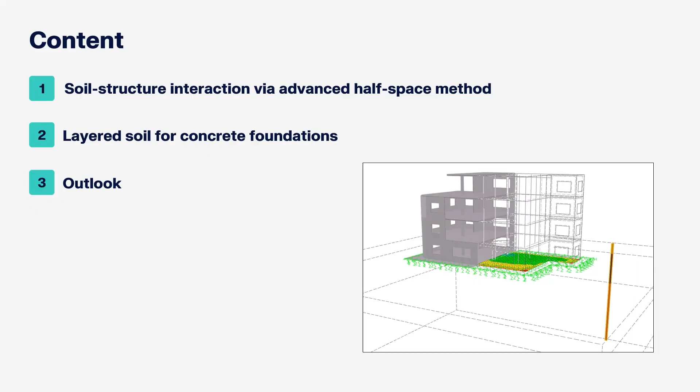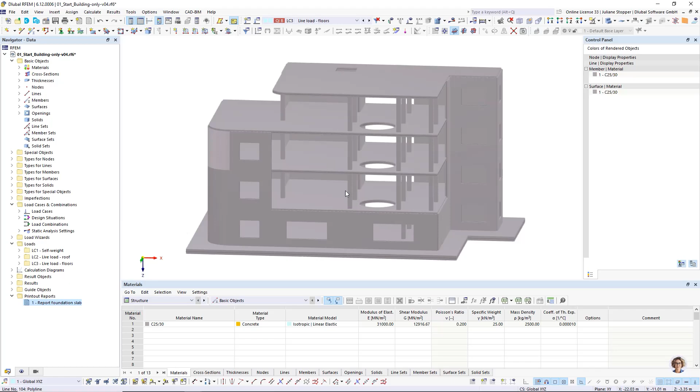Okay, that's it for the content, and now I would like to directly go to RFEM 6. Here we can see the building that is prepared for our model today. We now will work on preparing the input for the advanced half-space method. We have here a concrete building with walls, columns, slabs, and loads are prepared too. We have some loads as example, and now we can go to the geotechnical analysis.

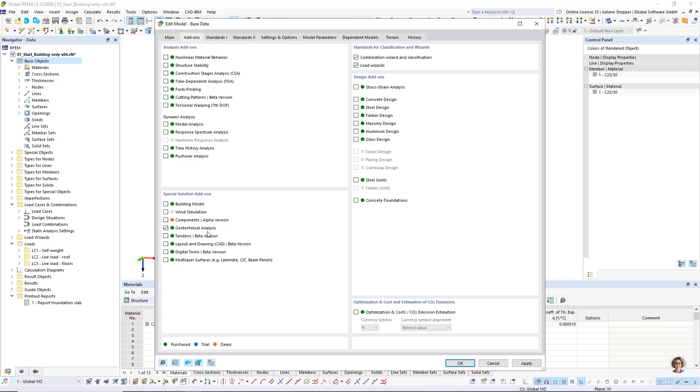The first step is that we need our add-ons, so we go to the base data, and here we can see the add-ons, and we should switch on the geotechnical analysis. With activating the add-on, the input options, calculation, and also the output options for geotechnical analysis are integrated into the main program.

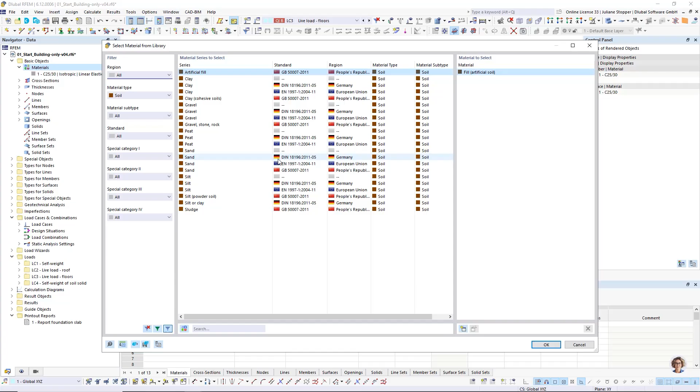The first step we start with is the materials. We have to define our soil materials, so let's create a new material. For the advanced half-space method especially, we would recommend that you use a material from the library as start material, and then you can modify the material properties. So let's go to our library. Here we can see different materials, and we will take this sand, as we anyway will give the input for our material described in the geotechnical report for the current project.

We have here material type soil, and the option user-defined material is always active, so we can directly start to modify the values that came from the library. If a material comes from the library, we have this register material values, and this is why we recommend it, because here you have more input values for soil property descriptions, and especially the oedometric modulus or constrained modulus, which can be used for the advanced half-space method.

This modulus is related to the modulus of elasticity and the Poisson's ratio. That's why we have connected them with equations. For example, if we give here another value, then our E modulus will change, and the other way around too. The Poisson's ratio you have to give directly, and the modulus of elasticity and the constrained modulus are calculated from each other and the Poisson's ratio.

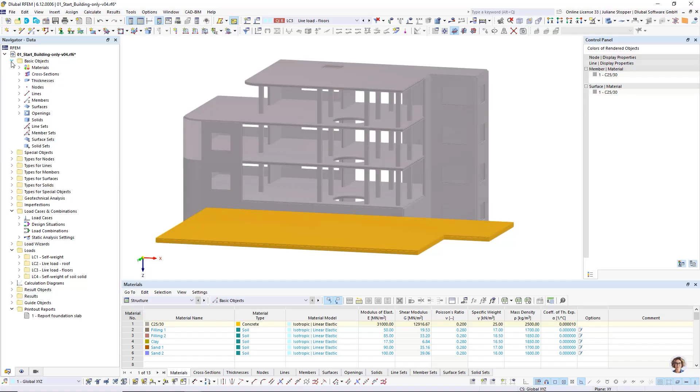Okay, then that's it for the materials. Here we are in the folder for the basic objects, so we find here cross sections and thicknesses of the building and other structure objects. Now we will go to geotechnical objects, and these we can find here in the geotechnical analysis folder. And we will start with the boreholes. So I go here and say create a new borehole.

The borehole can be used to give the information about the soil stratigraphy that was found by the tests and is described in the geotechnical report. You can directly give this input here. You can give the position where this soil stratigraphy was discovered, and then you can give the soil layers and so on. Here we also can give a groundwater layer. So let's say we have here 2 meters,

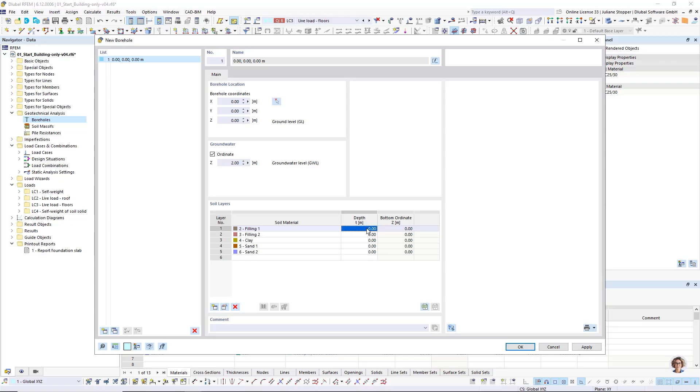and then we can give the soil layers, and we start with putting the materials that we just defined in the right row, and then we can define the thicknesses. The first layer has a thickness of 1 meter, the second layer has a thickness of 2 meters, then we have 1 meter of clay and 11 meters of sand 1, and we will give another 16 meters for sand 2. Okay, so these are the soil layers that were found or discovered below our building.

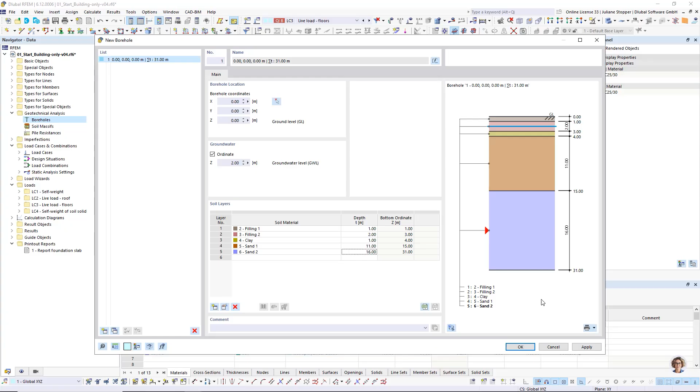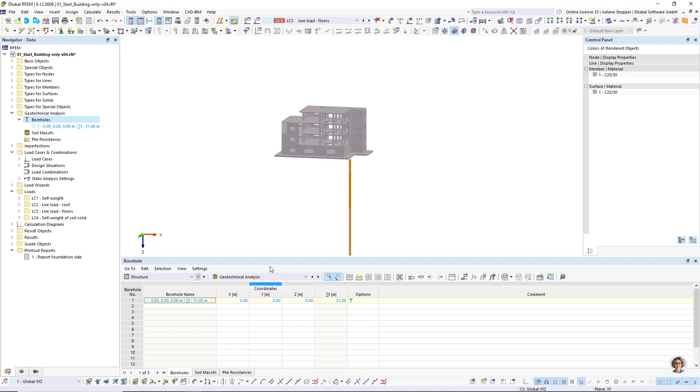We can say okay, and we have our borehole here, and we can also display it, so that we can see it graphically. This is our navigator for display, and here we can find also the boreholes, and we can see it is placed here now. The boreholes you also can find in the table, of course. We have here the structure, and here's geotechnical analysis objects. And here you can also fill borehole data, the coordinates, and you can also use the export and import for this table. This is just a small info beside.

You, of course, can define more boreholes, but for today we will just use one. It is shown in previous webinars how to model this with more. Okay, and then we can now go to the soil massifs. I do a double click so we get to the dialog for new soil massif. Here we can assign the boreholes that shall be used for this massif. And here we have definition type for the soil massif, and we have boreholes set. So this means the soil body, let's say, will be defined using the boreholes. We will see.

It will generate the layers, and I will show you afterwards, but let's go on with the input. Here you have the selection of the soil representation type, how our soil shall be modeled in this analysis. We have the finite element analysis provided for soil, but today we want to use the advanced half-space method for consideration of soil structure interaction. So this is our representation type today.

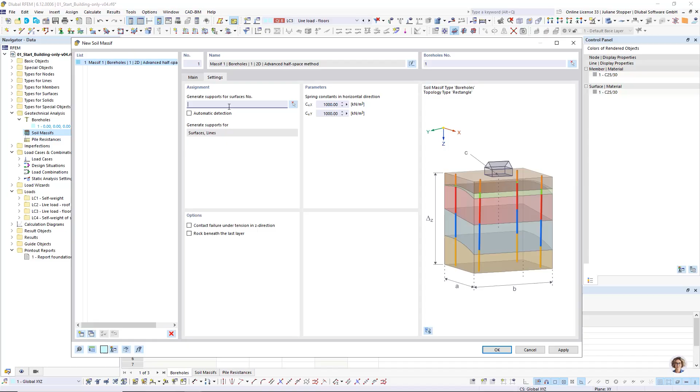We will also use the groundwater generation, so it will consider groundwater. With activating the advanced half-space method, we got this special settings tab, and here we give further input for this method. Here we have to select the surfaces that shall be supported. I will select them, I have 2 surfaces. Now they are assigned, and it is prepared.

We can see here on the right side that our advanced half-space method will generate vertical springs, and here we have horizontal springs, and these are the default values. We will keep them for our webinar model. The automatic detection will be provided, and here we can see what will be generated.

We will generate the surface support, and we will also have a line support to consider the soil next to the slab, and it's the support by the surrounding soil and also the shape of subsidence. We will have a look at this later.

Here we can find further options. We can activate that we want to consider failure under tension for the generated supports, and this option here is for simulating or considering a rock beneath the last layer, which will bring it about that below the last layer we defined in the boreholes, a very high stiffness is considered. But we will not use it here.

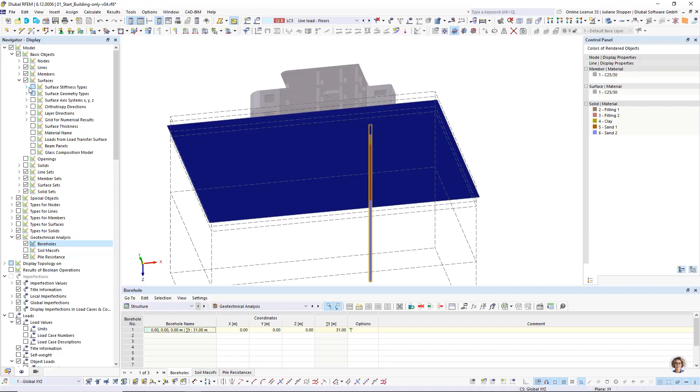So we keep the settings like this, and we go on OK, and we will see what is happening. I would like to not see that groundwater surfaces, it is not needed, so we deactivate it. Okay, so what do we see here?

Also, I want to have this transparent mode, and we go to the navigator for display and switch on the types for surfaces and types for lines. Now we can see here our building with our foundation slab, and we can see the lines of the soil and the soil layers, and we can see that some supports were placed. We can have a look at them here.

They can be found here in types for surfaces. Here we have our surface support, we will do a double click. This color means that it's a generated object. We can also see here with this button that it is connected with the parent, the soil massif, so it was generated by the soil massif.

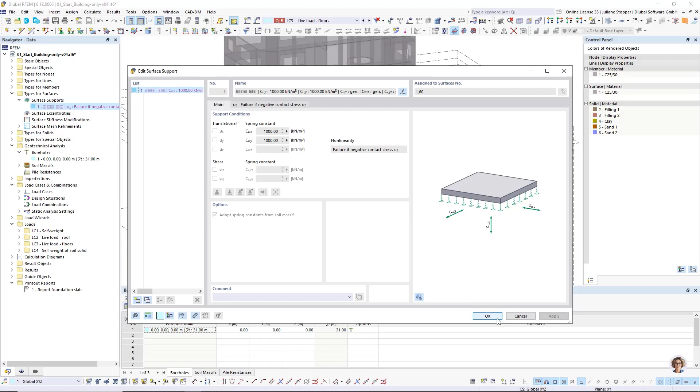And here we see our horizontal springs that were defined, and all the other values, the vertical spring Cu,z and the shear springs, will be generated for every finite element with the advanced half-space method. We can see that we have here our nonlinearity, our failure if negative contact stress σz. Then we can leave this and also have a look at our line supports. They are here, also generated, and we can see that we have the failure here too, and here the Cu,z will be generated.

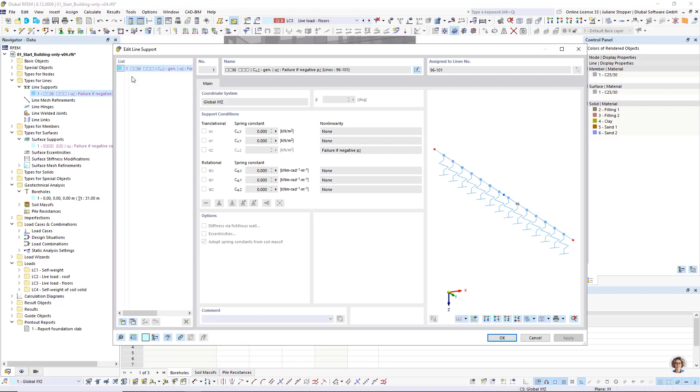We have a small workaround in the current state. If you just want to have the advanced half-space method producing just the surface support, it is possible that you can assign a manually defined support, for example this one, and give here a small value, and you can assign it to a line here at the boundary. Then this support will override the generated support, and in this way it's also already possible in the current state to just have a surface support here. This is just a short hint.

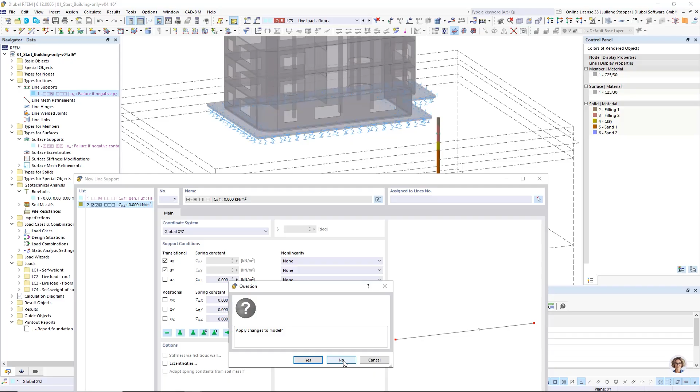No, I don't want to apply this. It is planned in the future that we also will provide that only surface supports can be generated.

Just as small info beside, but in the current state we have surface support and line support. One more thing, we can go back to the soil massif. I want to show you.

If we go here in this setting, in our dialogues we generally have this button, and if you want to know what some of these settings mean, you can go to our online manual, and here we provide information for this dialogue. It's linked here, and we can see information about the supports generated for this method. We have surface and line, and you can also go to the background chapter to see the equations used in this method.

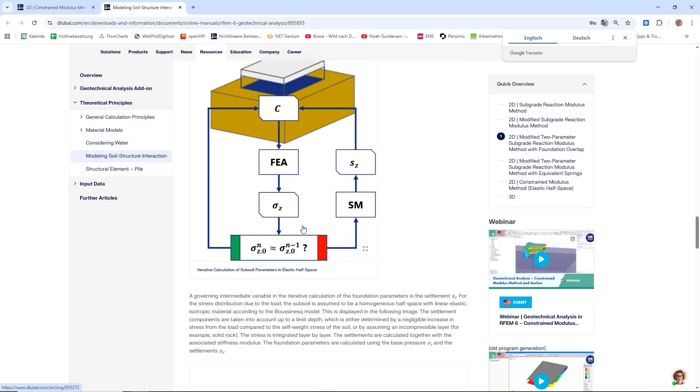We are now here, elastic half space method, and here we have a description and the equations for Cu,z and for shear springs, and also for the line support are provided. Just a small info beside.

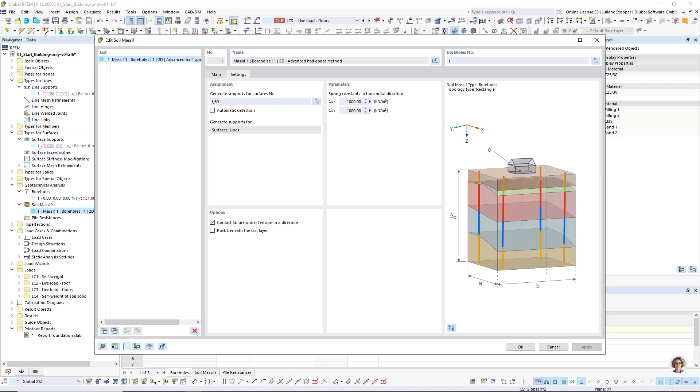Okay, then we can go back to our model. We are here. And we can leave this dialog. So now our geometry is prepared. We can see here, and we can now go to the loads.

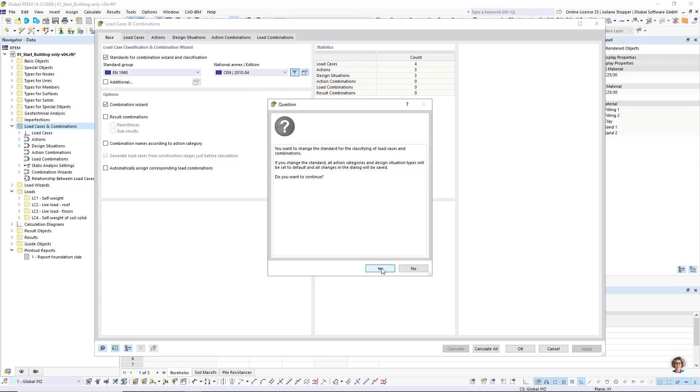As I said, load cases are prepared, but we will go to our dialog for load cases and combinations. We want to use in this webinar the combination wizard, so we want the program to generate the required number of load combinations. We can use the CEN here, and we use the combination wizard and the corresponding load combinations.

Okay, here we have our loads. I will change the action category because I just switched the national annex, and now my action categories are lost. We will correct this. So I have here, let's say these are office areas.

Then that's it. So I can show you the load cases here. Okay, so we have a self-weight load case and live load for the roof and for the floors.

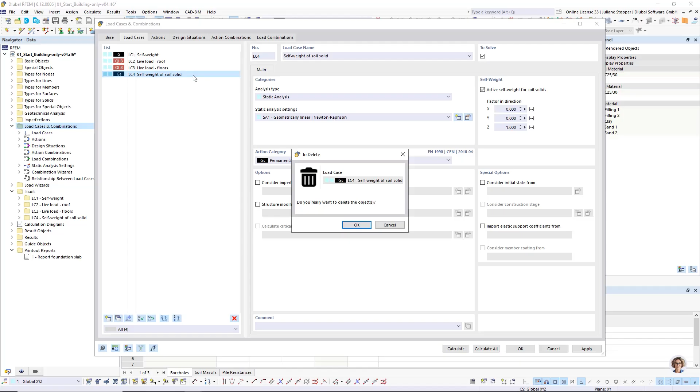And this load case came from the activation of the geotechnical analysis add-on. It is needed for the 3D finite element analysis, but for the advanced half space method we don't need it, so you can just delete it. It will come that this will only be generated for the 3D analysis, but in the current state it is also generated for the advanced half space method, which is not needed, so you can just delete it.

So this is the load cases that we will use. Then we can go to the actions, and here we can see our action categories that exist in our model. Then we have our design situations, and they are also lost.

I want to have this and quasi-permanent. So we have ultimate limit state and serviceability limit state for characteristic situations and quasi-permanent situation. And here you can also see the combination rules according to the selected standard that will be used for the generation of the combinations.

For the combinations, as mentioned, we use the combination wizard. It is an object that collects all the settings that have an influence on how the combinations shall be generated. So they are collected here, and I have the same wizard assigned for all my design situations. Here we can see our action combinations, and then here the load combinations. So the program generates all the combinations according to the standard with the load cases I have.

So about the advanced half space method, it is an iterative method for being able to consider soil-structure interaction, and this method is the same that was provided in RFEM 5 and was named RF-SOILIN. We have this here, the advanced half space method is called in RFEM 6, and this will be done for every load case you solve or for every load combination.

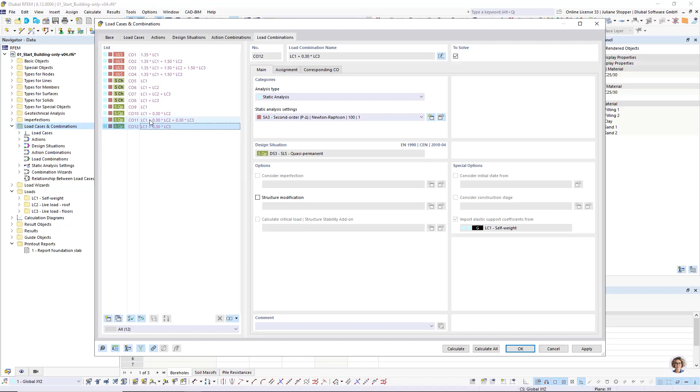With this definition in the wizard, it was decided that all these combinations will not have the advanced half-space method used. They will overtake or take over the foundation coefficients from that load case. You could also, of course, define different combination wizards, or you could also say quasi-permanent I want to solve. You could, for example, copy this and here not have it. Then this would not have the, I also have to set it. So then here this setting is not active, just as an example.

Okay, now I want to show you another option. We again go here to the wizard. I want to present the second setting here to you. Here you can go on corresponding load combination, and you can select a design situation. I will select now quasi-permanent. And what is done here, we will just check.

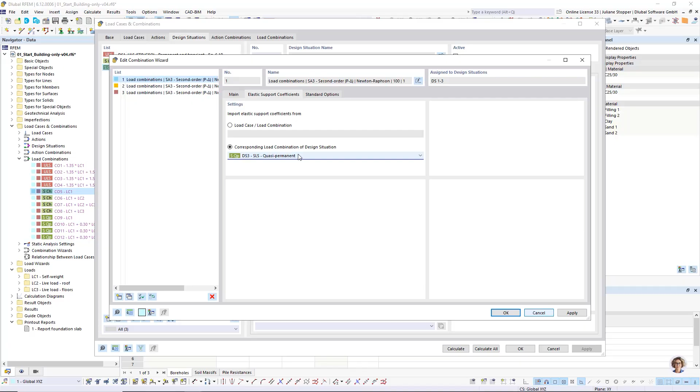So I select here the quasi-permanent, and it means that the elastic support coefficients will be taken, so the surface support will be taken from the corresponding load combination of design situation quasi-permanent. So we will have a look at it. What does it mean? We go here to the load combination, and now we can see that for my combinations I have this setting switched on, and I have here a quasi-permanent situation assigned. And we have here this register where you can see the corresponding combinations, for each design situation.

So this means the corresponding combination for CO1 is CO9. It also has load case 1 assigned. If we go to the next, we have here in this CO2, we have the load case 1 and 2, and the corresponding quasi-permanent combination is this one. And because of that setting in the wizard, this one will be assigned to that combination for taking the elastic support coefficients from.

And we can see it is done for every combination. And for the quasi-permanent situation, it is not activated because the program understands, or it was programmed like this, that of course you cannot assign the quasi-permanent situation for itself, and we don't want to assign something here. These shall be calculated with the advanced half-space method. So with this setting in the wizard, you can select a design situation that shall be solved and assign these supports from those to these combinations. Okay.

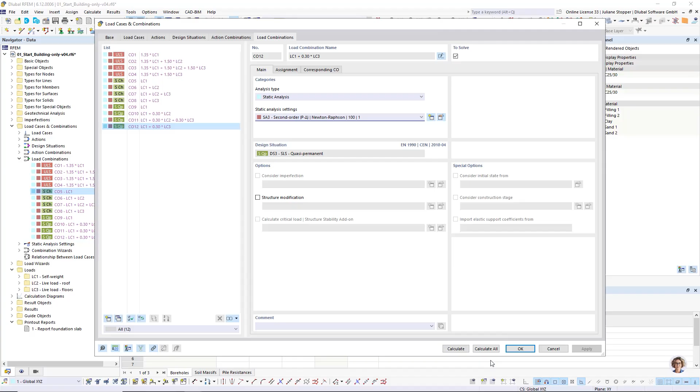Okay, now we are at the point where we can start the calculation, and we will do it. I click here and say calculate all, and our combinations will be solved. So here we can see now that at first our quasi-permanent combinations are solved because these have the supports that are required for the other combinations. So we can see how the program does its job.

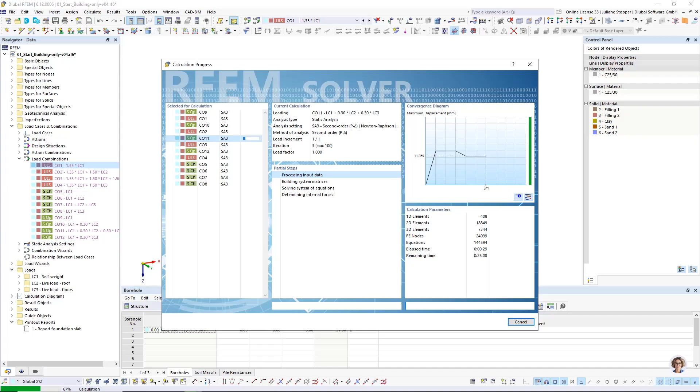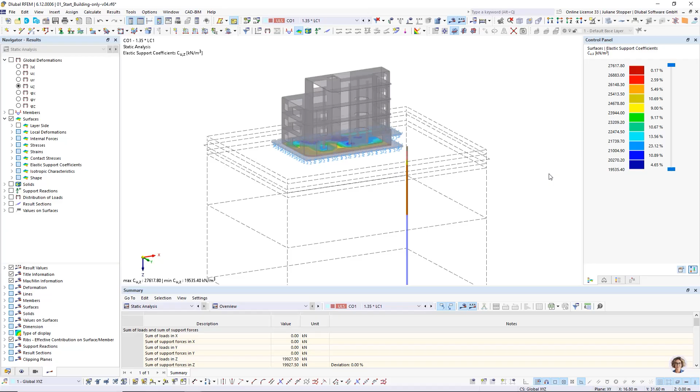Then I would guess that our analysis is done, and we can go back to the model. Yeah, here we can see it. Now we have results. I will go on the wire view, let's say, and we will have a look from the top. So what is displayed here? We see the elastic support coefficients Cu,z, and we can have a look at them here. Here we have our surface results, and this is now for combination number 1, the foundation coefficients. And as we know, this support was taken from the quasi-permanent situation. We can also switch to the corresponding one, and we will see it doesn't change.

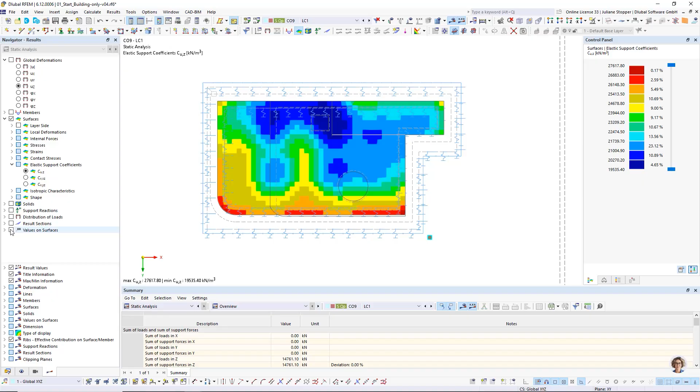For detailed info, we can also look at the values on surfaces. So here we have results more in detail, and we are now in the quasi-permanent combinations, and we can go to the next one, and now we can see that the values change. The values change because we have a different load situation, and there we can see that the soil structure interaction is considered.

If the building is changed, if the load in the building is changed, also the soil reacts differently. And it would be the same if you would change something in your building, remove an object or also add one, then also the soil would react differently. And this is the advantage of this method. It is able to consider this, the dependency of the soil reaction to the loads and stiffnesses in the superstructure.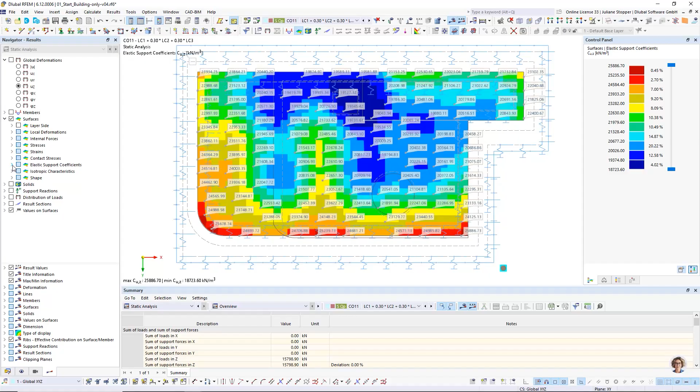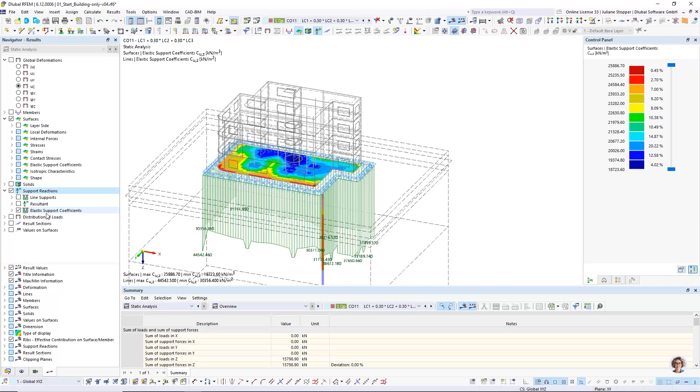So here we have CUZ, and we also have the shear support coefficients. We can check them, and this is it for these foundation coefficients. We can switch off the values on surfaces, and we can also have a short look at the line supports. We can see them here in the support reactions, and here we do have them. We can switch them off again, and we can also place result sections.

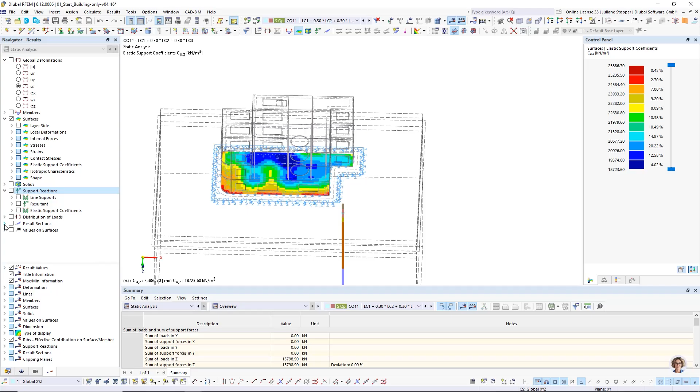There we have this button here where you can select from which node to which node the result section shall be positioned. And I already have prepared 2 result sections, and I can activate them here, and I can see results for these sections. I also can display just one. And for these sections, we can also go here to result diagrams and see the result in more detail.

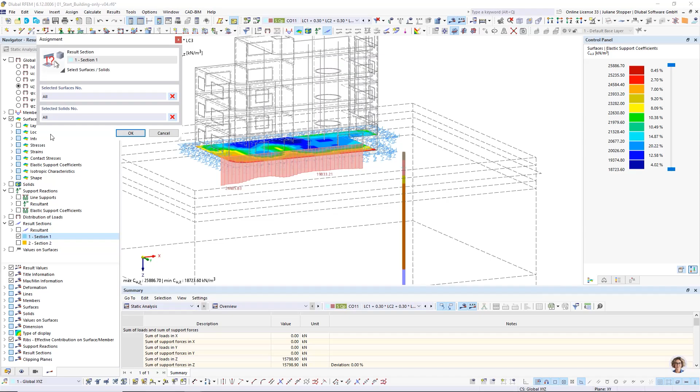Now I see that I should change my section a bit. I can go into it, edit it, and I should not assign all here. And I will select only this slab surface, which is here. Okay. And now I can show you the result diagram. And here now you can see it in more detail for this result section.

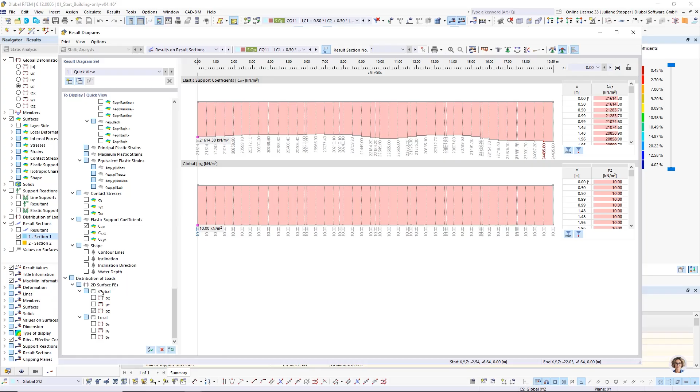We can see the stresses and the deformation, and also we could have here the, where is it? The support coefficients. Here we have the elastic support coefficients. It was already active, and you can see contact stresses and so on. These you can also print out in a report for detailed documentation.

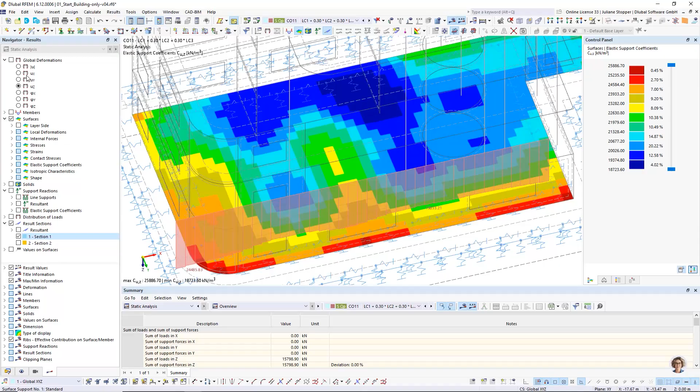Okay, and of course you can see the deformation also here that occurred because of this load situation and how the soil reacts to it.

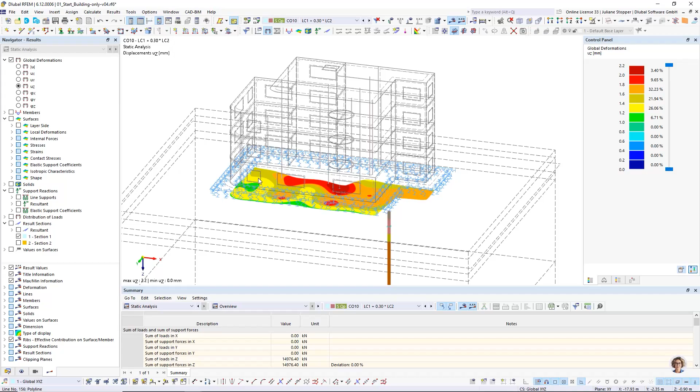So this is it, what I wanted to show regarding the advanced half-space method. So in RFEM 6, it is possible to consider this iterative method for soil structure interaction for as many combinations as you wish, and we also do this iterative procedure for every single finite element. Okay, this shall be enough for introducing this method.

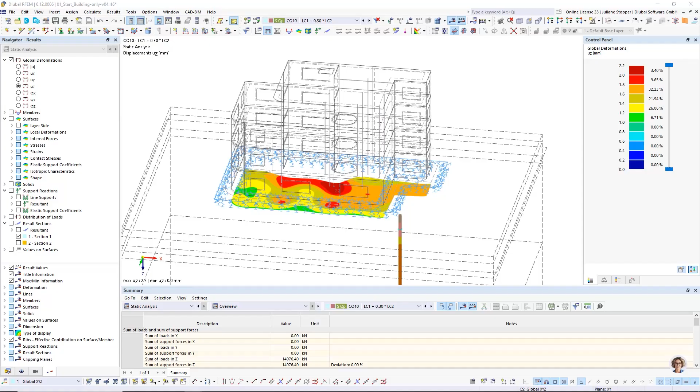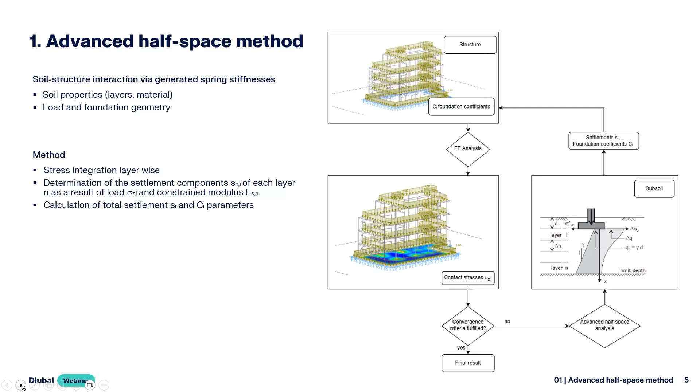Then I would like to go to the foundations, as I told. Therefore, I have a model prepared here. We have it here. And I want to also show you the slide as a short introduction. As I mentioned, we have a new feature for our concrete foundations that I would like to introduce to you today. We now have for concrete foundations for the geotechnical design different methods to define the soil layers.

We have therefore the type single layered, where you can directly define the soil layers in the dialog for the foundation, relatively simple and quick, and this is a fast way of direct input of the soil situation. If you have a layered soil below the foundation and you want to consider this and define it, we provide the option to use the borehole dialog. For the add-on Concrete Foundations, the borehole dialog is provided too, so there's no Geotechnical Analysis add-on needed for using this solution. There you can go to the borehole as we showed for our advanced half-space method, define the soil layers, assign it to the foundations and use it.

And then the latest option that was released is that you can use the soil massif. For this solution, the Concrete Foundations add-on and the Geotechnical Analysis add-on should be active. And there you can define the boreholes wherever you have them from your report, and you can generate the soil massif, and then automatically every concrete foundation gets the soil stratigraphy that acts below that foundation.

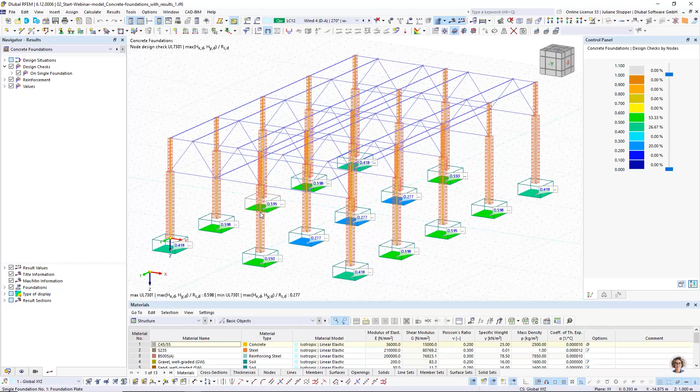Okay, so now we will go to the program. Here we have the model from the last concrete foundations webinar, and it was calculated with the first method, the simplified way. We have here the concrete foundations folder, and we can see we also have a geotechnical analysis folder with just the boreholes, so they come with the add-on concrete foundations.

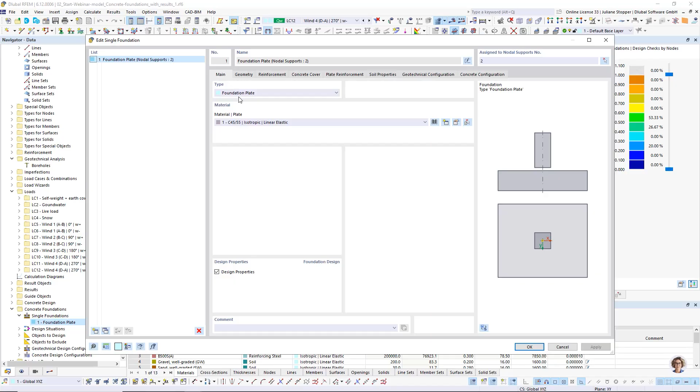Now we can go here, and this is the dialog where you can define foundation settings, and here we have one tab for the soil properties. This is the single layer definition type. You can quite easily say which soil shall be placed below the foundation, which is next to the foundation, and which is on top, the earth covering soil. This is the one way.

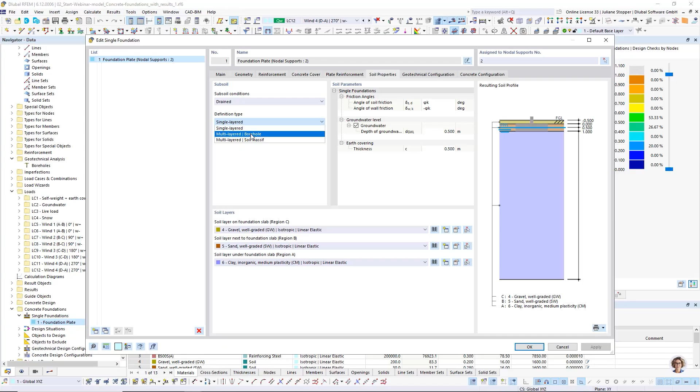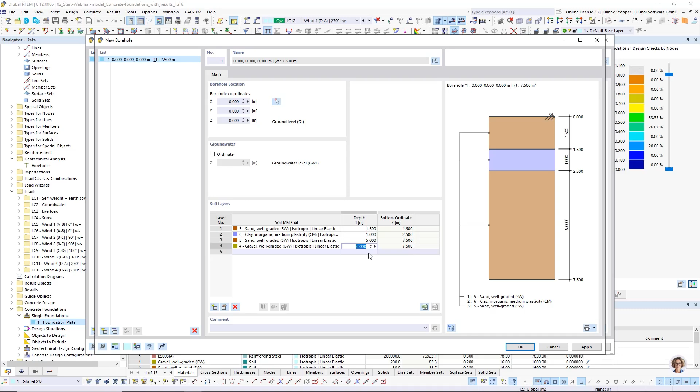Then you have the multi-layered borehole, as I mentioned. There you can directly from here create a new borehole. You could also use the other way like we did before. So let's say that we have here a sand, a layer of clay, again sand, and then a gravel. Maybe it's 1.50, it's just an example. Then 1 meter thickness for the clay, 5 meters for the sand, and then maybe another 12 meters for the gravel.

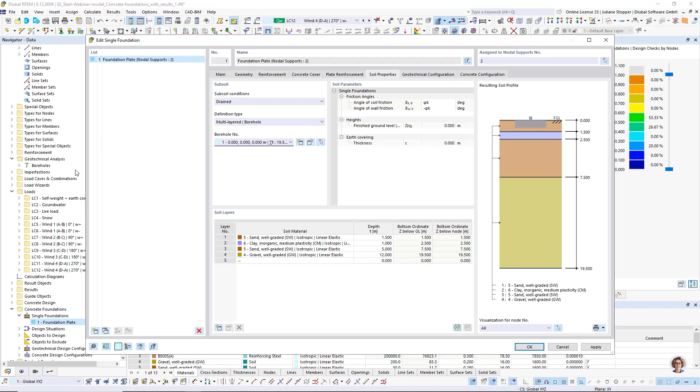We can say OK, and then the borehole is created. We can see here an object exists, and you can assign it here. If you had more, you can select which one, and you get this table as an overview, but the data is filled in the borehole dialog. So we can say OK. Yeah, the results are deleted then.

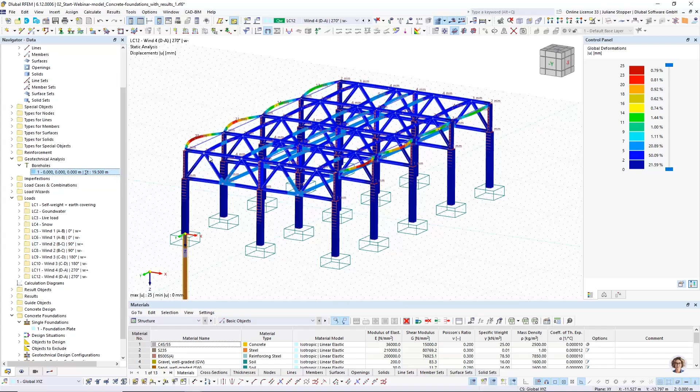What we see here now is the static analysis for the superstructure. Only the concrete foundations results were deleted. So here we see our borehole. It was created, and these foundations now would use this borehole. And now I would like to show the other input option.

Therefore we have to activate the geotechnical analysis add-on. We go here to add-ons and activate our geotechnical analysis, and then it's OK. It exists, and we will then have the soil massif here so that we can use it. It is relatively slow, probably connected with sharing the screen. It should be done soon. Okay.

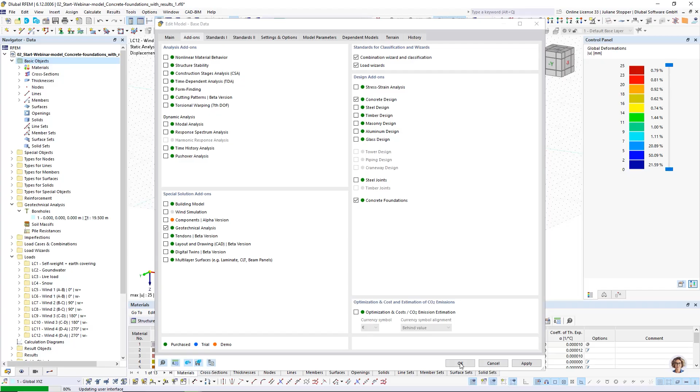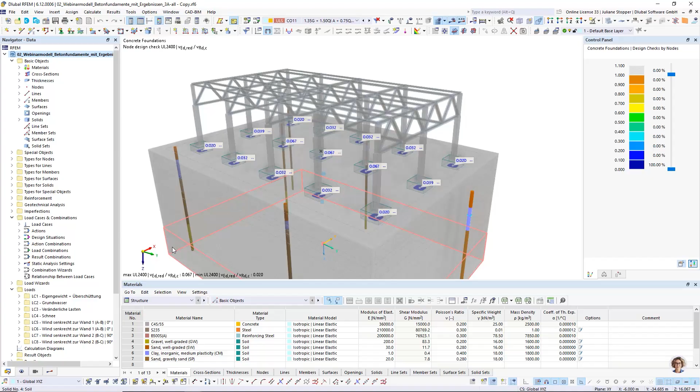So now we have here the soil massif, and we can create a new soil massif. But I would like to show it to you with a model I have prepared to save some time. We have it here, it is already calculated. In this model we can see we had several boreholes from a geotechnical report. The input was done, and our soil massif is created.

Let's have a look into the foundations, soil properties. Here we can see that the definition type soil massif is used, and we see the soil layers for the foundation at node number 70. We could also check it, for example, for node number 1. Now we see that the thicknesses of the layers changed, so the program finds the soil profile for every single foundation, as we spoke.

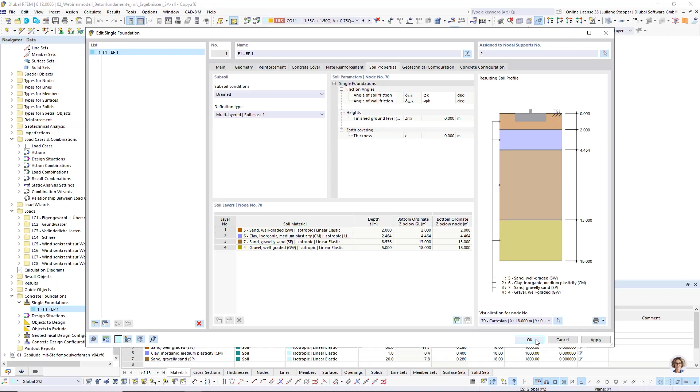You can also display the visualization for all the foundations in one table, and you can see from which thickness up to which thickness exists in the whole model. So we have foundations that have a clay layer with a thickness of 0.76 up to 2.48, and so on. This is the summary of all the foundations in this model, and you could also look in detail separately at the foundation nodes. Okay, so that's it.

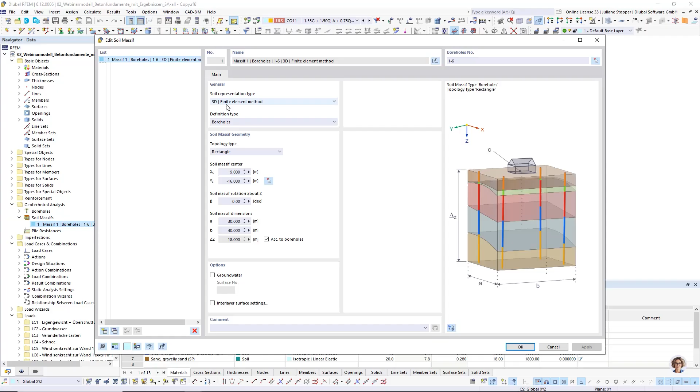Then you have the input prepared, you have the soil massif, and there are two little things that should be taken care of in the current state. One thing: the soil massif here has the setting that the soil will be represented with the 3D finite element method. So this is a solid.

If you want to just calculate your superstructure and use it for getting the soil properties for the foundations, then you don't want to analyze the full 3D body, and therefore you can select the solids here, go to edit, and say deactivate for calculation.

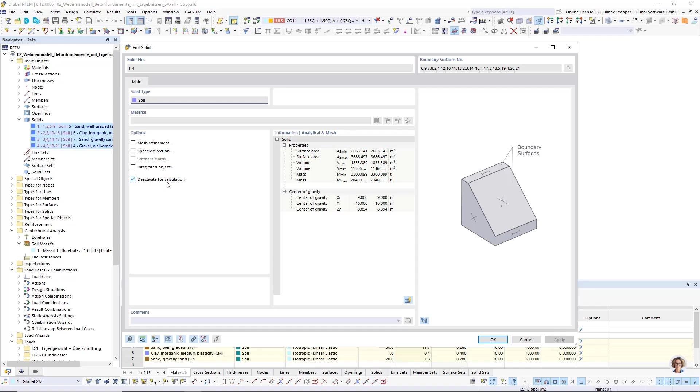This is one important setting, as it saves some time if these solids are not calculated, and it is not required to do the 3D analysis for the soil if you just want to have the info about soil layers for the foundations. This is the one setting that you should take care of, and the other one is that also here this load case that I showed before would be generated from the program.

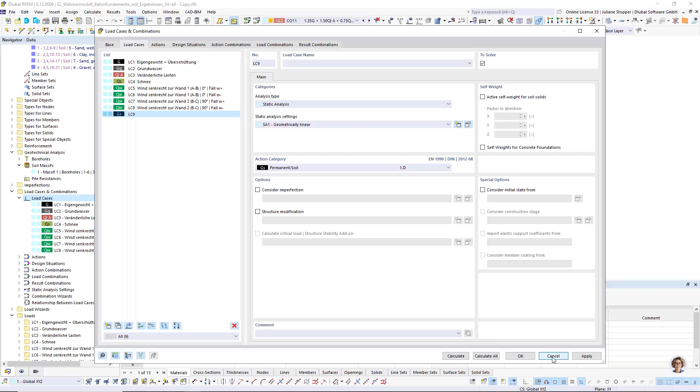So if you see it, you can just delete it. It is not needed here. This will not happen anymore in the future. We are working on this topic. So these are the two things in the current state that should be taken care of, and after that you can go here on concrete foundations, start the calculation, and then these foundations will be analyzed and designed.

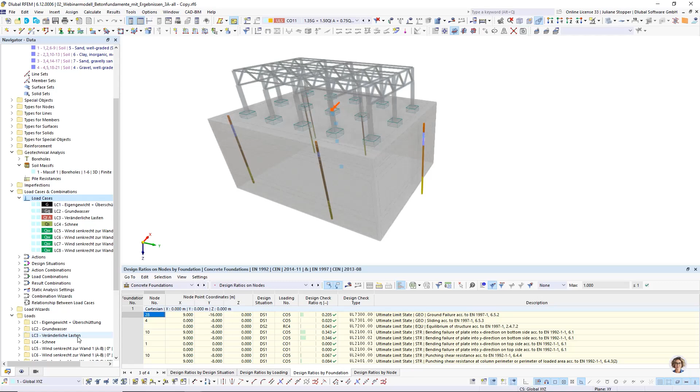Yeah, for further information on this topic you can see the previous webinar on these design checks, and that's it for this introduction to the ways of modeling the soil properties. Okay, then that should be it, I guess. Then we can go back to the slide. Here we go.

We want to have the outlook, and these are the next development steps for our add-on Geotechnical Analysis. In the near future, we will release the slope stability analysis using the phi-c reduction, so we are able to analyze these situations, to check the slope stability. We are looking forward to providing this feature to you.

Now we have the 3D analysis and we have the advanced half-space method. We are also working on providing the subgrade reaction method to you. It is another option to represent the soil behavior as a surface support, and it's not an iterative method.

And we will present further material models for our finite element analysis for the soil, and therefore we are working on the Cam clay model so that we can provide this to you, and also the jointed rock model. I think these are the next steps. Besides that, we are of course working on improving the solutions we already have. This shall be it.